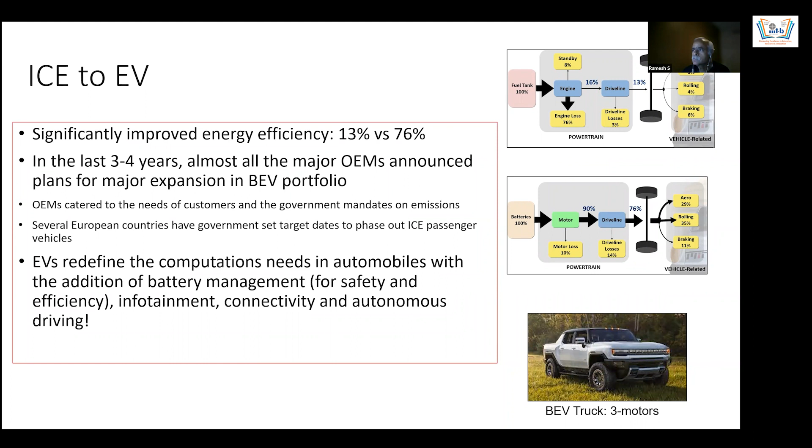So in the hardware architecture, I think GM is probably one of the first companies to introduce microcontroller-based systems. Their electronic spark timing control was probably one of the earliest electronics introduced into vehicles. But today, with high-end cars, advanced driver assist systems and autonomous driving, there are more than 100 ECUs, as they are called, from micro to mini to major control units, controlling different parts and computing different functionalities. And then you have more than 100 million lines of code in today's software, and multiple tens of networks connecting these ECUs.

And the evolution that is happening is that from 100 ECUs, they are trying to do highly integrated, thanks to the advancement of hardware, system on chips, with 2 to 3 centralized compute platforms enabling these multi-domain integrations in today's vehicles. This is another evolution that needs to be taken into account, because the way in which software would be architected becomes quite different when you move from highly distributed architecture to a centralized one.

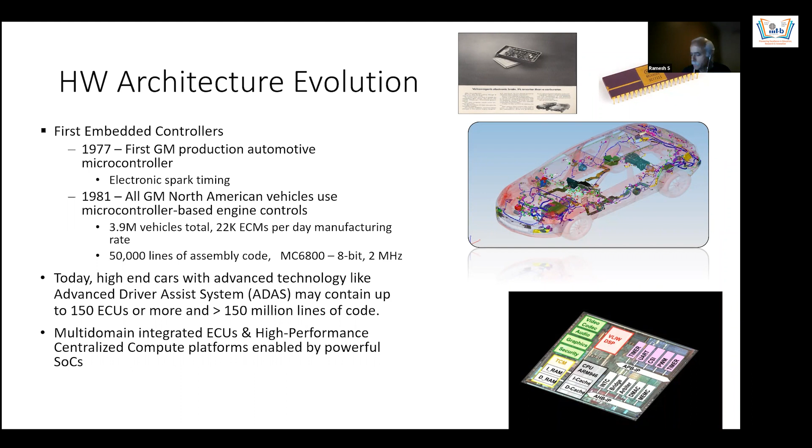As I said, this hardware evolution also is triggering the software architecture evolution. So we are going in a kind of big cycle. We started with centralized architecture, that became distributed, and is again becoming centralized architecture. In automotive software, people have been talking about middleware based architecture. You might have heard of terms like AUTOSAR, which is a middleware platform or middleware architecture. From classic to adaptive AUTOSAR, that is one evolution that took place.

And the more recent one is Ultifi. GM, for example, has a software platform called Ultifi, essentially triggered by the various developments in the smartphone industry. Even software in tomorrow's vehicles is going to be app-based. Ultifi is a platform introduced by GM for external suppliers and also for internal development to architect software as a collection of apps running on these platforms. Even the internal services could be app-based. So this is a preview of what is yet to come.

So the way in which software is architected will be quite different going forward. Instead of building software for individual controllers, creating builds for those individual controllers, and then connecting them together when the vehicle is rolled out of the factory, after which the software never changes, we are going into platform-based architectures, and the software will be evolving continuously.

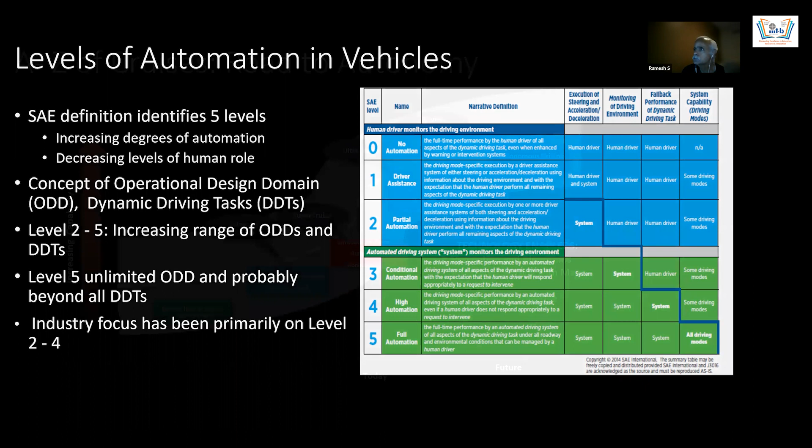In the case of GM, GM is also in this journey. Every automotive OEM is in this journey, and for GM I would call it different variations of cruise. We had adaptive cruise control, then that gave rise to Super Cruise, and Super Cruise to Ultra Cruise, which is a new feature that GM is introducing soon in the market.

Those who are living in the California region might have seen that Cruise Automation, which is a joint venture with GM, is running robotaxis, and the California transport organization has already given approval for running these vehicles. So this journey to the fully automated vehicle is on, and it's a matter of time until they might be fully in deployment.

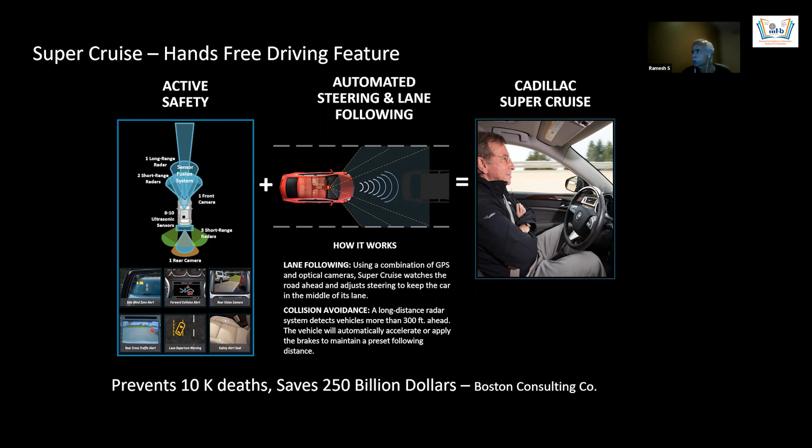Super Cruise is one of the features that are already in the market. Professor Chakrabarti was mentioning that some of us were actually involved in the verification and validation of this feature. It has several long-range radars, front cameras and ultrasonic sensors, with different features integrated together, like forward collision alert, lane departure warning, keeping the vehicle within the lane. Two important features are following the vehicle within a particular lane and avoiding collisions. So essentially, it's an integration of active safety and automated steering and lane following features.

So level 2+ features are essentially shifting the software functionality from the traditional control system paradigm of sensing, controlling, and actuation, to a more robotic paradigm. Perception is becoming more important: perceiving the road condition, perceiving the situation, accordingly planning, and then acting. So slowly it is becoming more and more automated. In perception and planning, like many other domains, AI and machine learning are playing an important role, like detecting lanes, traffic signals, various 3D object classifications, and then planning paths and so on.

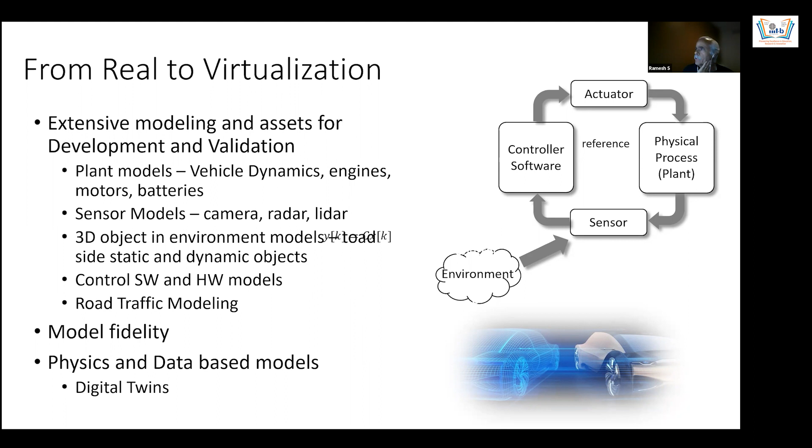So if you look on the right-hand side, a simple control loop; there are several control loops running in our vehicles. And if you look at each of those boxes, including the environment, all of them are being modeled and integrated. So many tool vendors have started providing features and methodologies for creating models of the environment, and then running hundreds and thousands of simulations in order to validate your software changes. So these are several changes, transformations that are happening.

And so my focus of research has been on validation. System validation, even prior to these changes, was a major effort in development, 60 to 70% by all estimates, divided into two major activities, verification and validation, as we like to call it in this area. Verification involves checking whether the described requirements are met by the system, whether the system is built right, whereas validation is about whether the right system is built or not. So there is always a gap between the intention and the implementation, and this gap increases as we start building more complex systems.

I will give you a pause here. So are there any questions, Professor Chakrabarti? I hope that all of you are there. So what I have done is invited the members of the audience to type out their questions in the chat boxes, and we would take them up at the end of your talk. This has been the tradition in Samvaad so far. But if you would like to take them up right away, that's your call to take, of course. Please feel free to do as you prefer, or otherwise we'll go with the traditional approach and take them up later. Sure, that's fine. Let me go ahead, and then maybe we could have a longer interaction session, right? Yes, yes. Okay. Thank you.

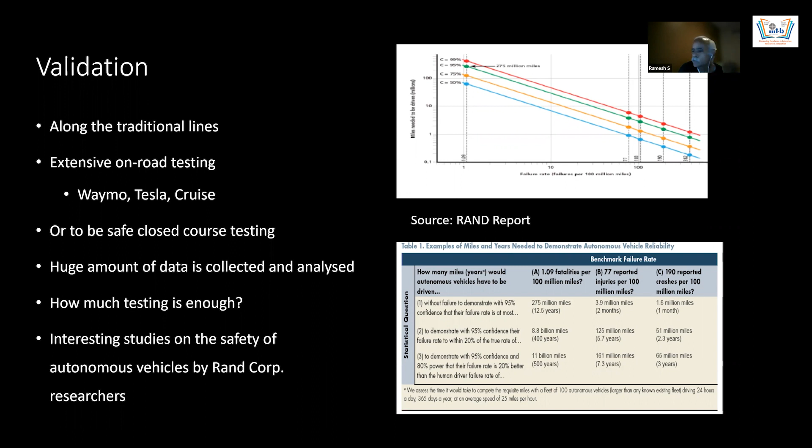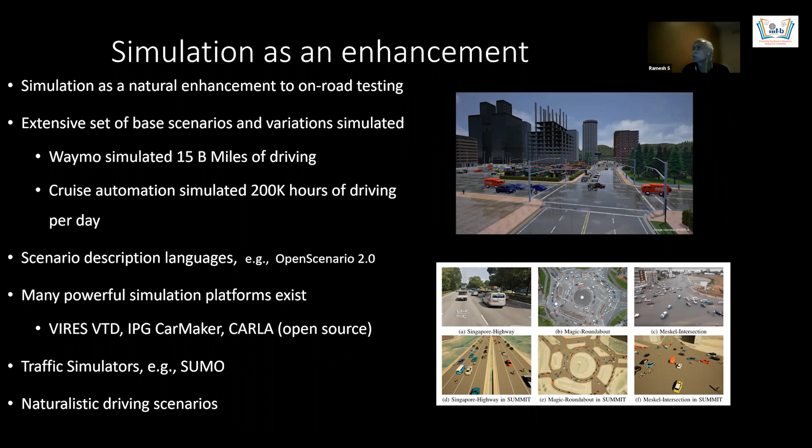Right, and the traditional challenges: several issues face level 3+ systems. Perception capabilities, especially those enabled by AI functionality, have several problems. And safety, functional safety, right? Safety under failure. This is one of the most studied efforts. ISO 26262 is one of the functional safety standards, and these standards are very much applicable for validating and developing level 3+ systems as well.

One of the factors that affects validation of these systems is performance, right? The size of the systems is enormous. If you are talking about deep neural networks being used in these systems, they are DNNs of millions of parameters, and 50 layers are quite common, right? Some of the sensor manufacturers, camera manufacturers like Mobileye, incorporate these complex networks to identify objects and situations and so on. How are we going to validate them when their sizes are so large?

Of course, there are many novel challenges. People talk about not only safety under failures, but insufficiency of perception. This is something very common even for human beings. Assessing situations, avoiding collisions and so on, requires a lot more knowledge, right? Not only the mere perception of objects and events nearby, but you need to think about their intent. What could possibly happen in the future? Some kind of mental replay of those behaviors and so on.

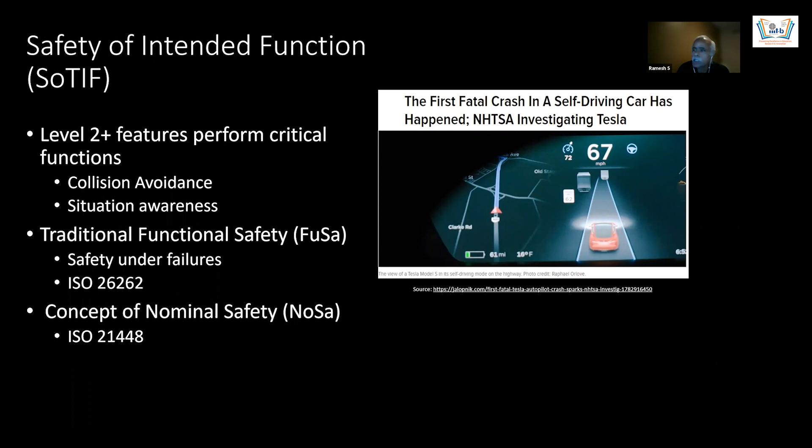So looking at the kind of enormous challenges which are already there in today's vehicles, and as we are introducing level 3+ vehicles, verification and validation is not a simple task. You cannot have a black box approach of architecting your system and then feeding it into a verification engine that simply analyzes and brings out the results, whether there are any faults or not. I think a more deductive approach needs to be followed for V&V.

So essentially, the industry is trying to follow some kind of arguments and evidences for building a case for correctness. Now people talk about absence of unreasonable risk, right? I think this is explicit in safety validation in some of the safety standards, and in some of the verification tasks, it is implicit.

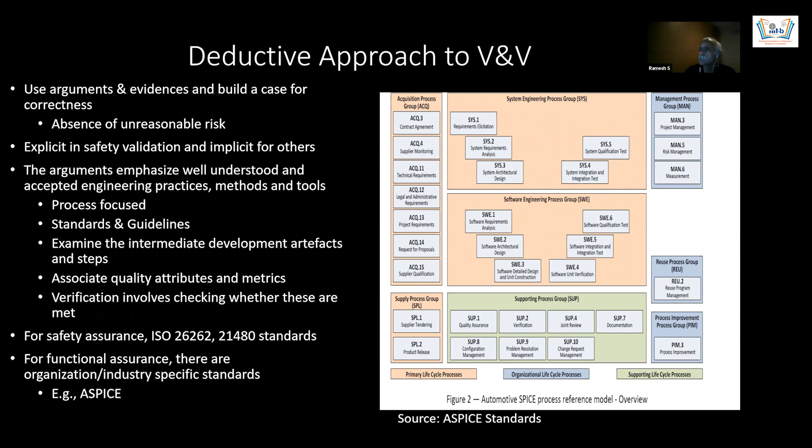Right. So there's a kind of an argument strategy that you need to employ when you're reasoning about the correctness or safety of these systems. So one has to distinguish the intention and extension as you do in verification and validation. And if you look at the right-hand side, we need to really decompose the requirements along different lines. You have functional requirements, safety requirements, security requirements, and a host of other requirements, even performance requirements, and so on. And then verifications will be based upon explicit requirements.

So it's a systematic exploration of hazards and faults, and then tracing their origins, and then what kind of analysis one has to do, and what kind of actions need to be taken. So you talk about hazards and safety goals, which includes safety requirements as part of the functional requirements, and then assigning what they call automotive safety integrity levels. Now people talk about ASIL A, B, C, D, D being the highest integrity level.

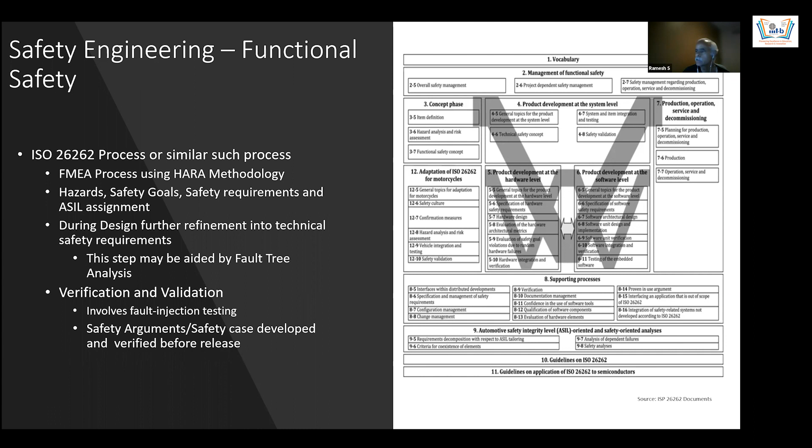So in the case of 21448, people talk about safety of the intended function. It involves systematic identification of hazards caused not necessarily by failures, but, one could think of them as systematic failures caused by limitations or insufficiencies of sensors and sensing. Even misuses need to be taken into account. When we say misuse, there could be a misunderstanding by the user, right?

And I think this is one of the challenges in validation, to look for these unknown limitations using long exposure testing. And then you release a vehicle only after you are sufficiently sure, and as and when these unknown limitations crop up, you need to be agile in updating your software and so on. In some sense, nominal safety engineering has also given rise to this, enabled by connectivity, over-the-air updates and so on.

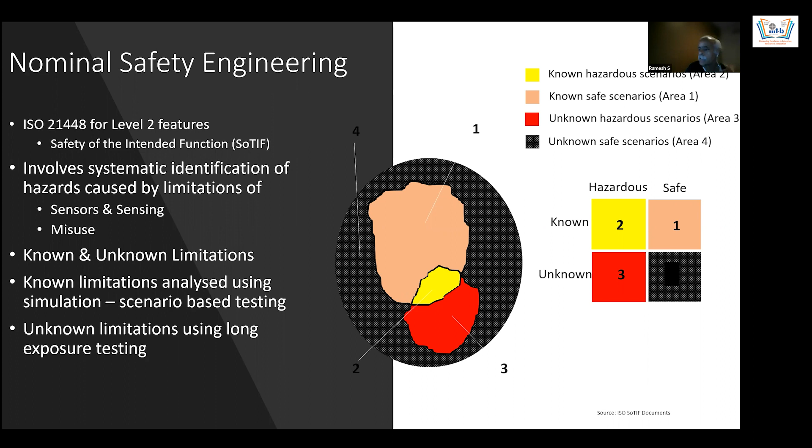Right, I think functionality and safety are tightly integrated. Every design step undergoes safety analysis, and then safety analysis leads to design iterations. Iteration and integration of functional safety and nominal safety need to be done. And V&V steps are expected to provide evidence of all the three concerns. And as I said, additional assets need to be created, like safety requirements, PHA analysis, fault tree analysis results, and then safety cases need to be demonstrated before a vehicle can be released or before any update is.

So as a result, there is a host of V&V assets, requirements, test cases, coverage data, verification plans, verification models, and they need to be maintained. Just like software, they need to be maintained and revision controlled. And more important in the agile era as things are changing.

Right, so completeness of verification is always a kind of concern. Coverage is a very standard metric for verification. Requirements coverage, code coverage, and so on, but these are primarily used in unit testing. There are no good metrics for integration testing. And at least in individual control algorithm developments, one can use correct by construction, but ultimately for the end product, you need to have more rigorous methodologies for validation.

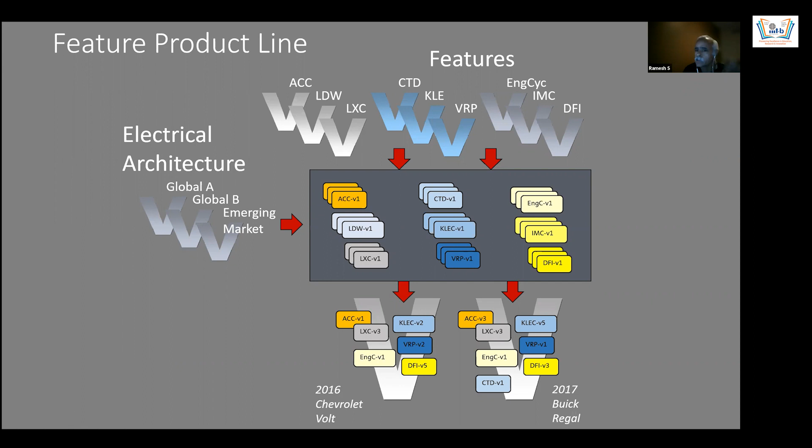If we take a GM-like company, GM has a whole product line, multiple products being architected, but they all have some kind of product line approach of common assets with variations and so on. So when you talk about development of individual products, you cannot architect the entire system individually. You need to have a set of common assets. Architecture could be common, certain base software could be common, but the applications might be changing. As a result, verification and validation need to also take into account the structure that is available in the product line, right?

And another feature introduced by level 2+ features is huge variability in the environment, right? Besides the physical plant, your engines and electric motors, there could be variations in that. Some of the assets, especially application assets, could be used across different engines and motors, from ICE, but there are even variations in environments. If you are going to talk about lane keeping assist or lane change, right? Now imagine the variabilities that are going to occur.

When you talk about verification, you need to take into account these variations, the different gaps, different users, different vehicles, the enormous amount of variation that exists. How are we going to validate that? Before releasing a vehicle or releasing software, one has to take into account these variabilities. So the challenge of validating and making sure that all these variabilities are nicely traversed or analyzed is an important issue.

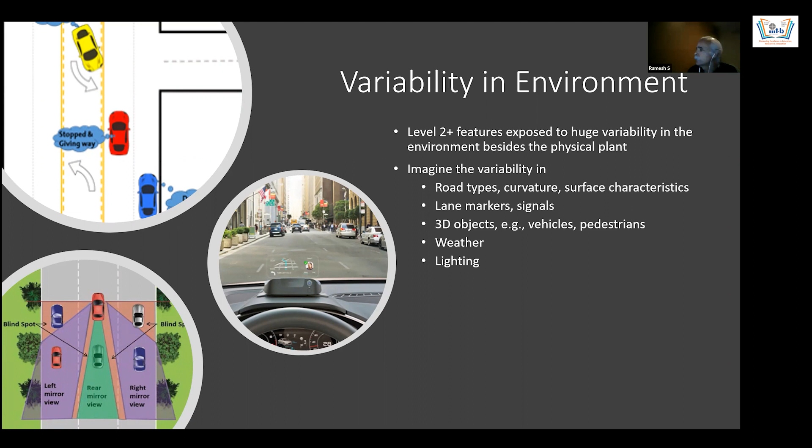So the V&V of product lines assumes greater importance. How do we provide a guarantee for all the products, right? Products are the individual instances of this product line. There could be an exponential number of products, an infinite number of environmental variations. So some of the solutions people talk about is lifting V&V methods from products to product lines, what they call 150% product modeling. So essentially, instead of modeling one product, we model the entire product line.

And tools and methodologies are in place. For example, large-scale cloud-based simulations, design of experiments, statistical sampling, and digital twins. These are some of the technologies being introduced. Essentially, take one product line, introduce parametric variations, do some kind of parameter sweeping, and then run multiple simulations on the cloud, and look for any possible deviations in behaviors and so on.

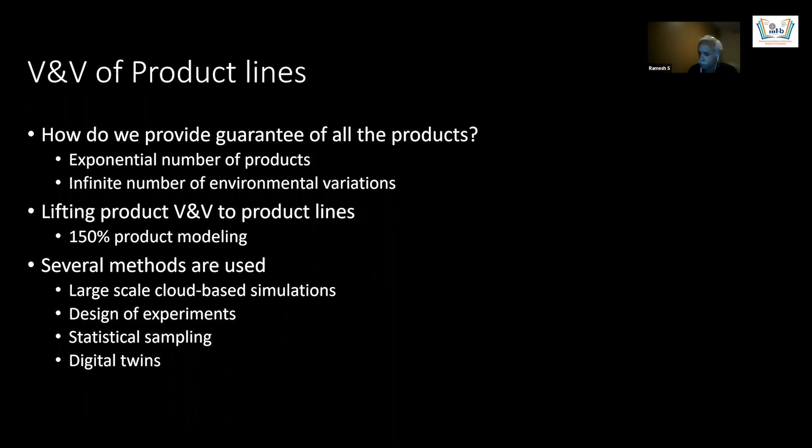Right. I think the other one is triggered by this new software-defined vehicle architecture. So we are talking about continuous V&V, right? Just like design is being continuously changed and revised, one needs to do continual, continuous V&V. So there is even more variability that might occur over the lifetime of a vehicle.

For example, people are talking about subscription-based functionality, right? Every individual vehicle owner could ask for different features. So vehicle A could differ from vehicle B because the respective owners might have subscribed to different functionalities that might give rise to different variations or configurations. One has to validate all those possible configurations.

And it is becoming a kind of common feature: continuous monitoring of property violations in the field, looking for new corner cases and edge cases, quickly reacting to these, and then creating and developing updates and modifying them will become commonplace going forward.

So as far as the work is concerned, various new standardization activities have started: industry-wide guidelines and standards for design and verification and validation of level 3+ systems. It's an active area. Extensions of 26262 and 21448 standards are being worked out. Some of the standards and documents are coming out. PAS 8800 is one of the documents being prepared.

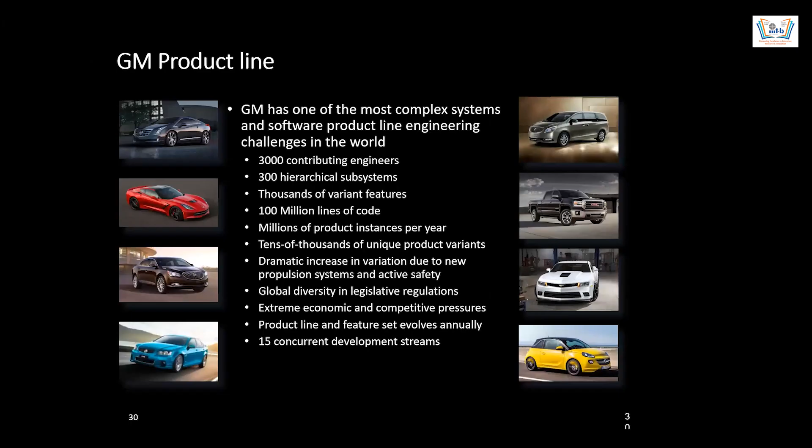Now, if I have to validate, let's say on a PC setup, that's entirely different. So we cannot really expect that it would behave the same way, because that's a very significant variable which is going to change. Right. Okay, so I got your question. So I think I have just flashed this slide.

I think that is one of the reasons why these multiple levels of in-loop simulations are being carried out, right? So for example, MIL, it's in the modeling space. You can use MathWorks-like modeling tools, and here you model everything in your favorite modeling language, and then do in-loop simulations of the model.

Then you have the next level, software in the loop, where the source code of the software that's being developed is being tested. And then finally, when you talk about HIL, hardware in the loop, here actually the target code is being tested.

So essentially, on your PC, only the application functionality is being tested in the software in the loop, whereas in the hardware in the loop, there are simulation facilities available where you actually flash your software onto the controller and then include the controller in the validation, right? So what is being tested is the final target code rather than the source code.